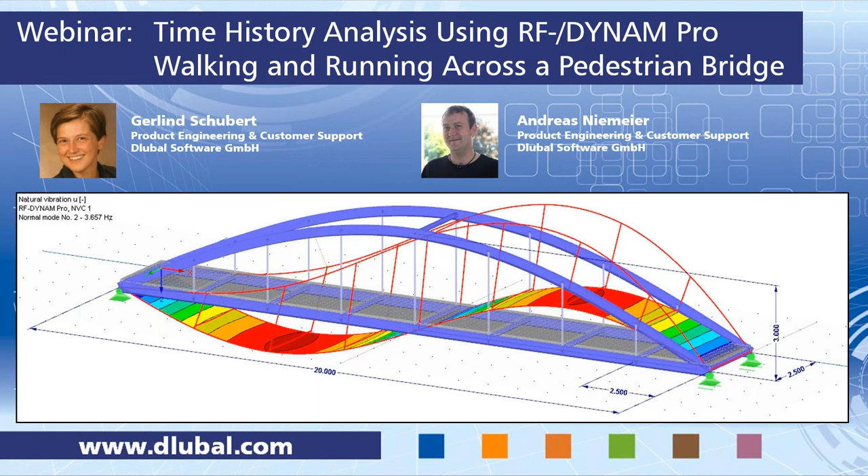We want to talk about time history analysis today and how to use RF-DYNAM Pro. We will simulate walking and running across a pedestrian bridge. My name is Schubert, I will demonstrate the webinar today and show you the example in RFEM, and my colleague Andreas Niemeier will help me throughout answering your questions. This is the model we look at today: an arch bridge, where persons walk in the center along the bridge. We simulate an excitation which changes in time, but also changes in position. That's the important bit today.

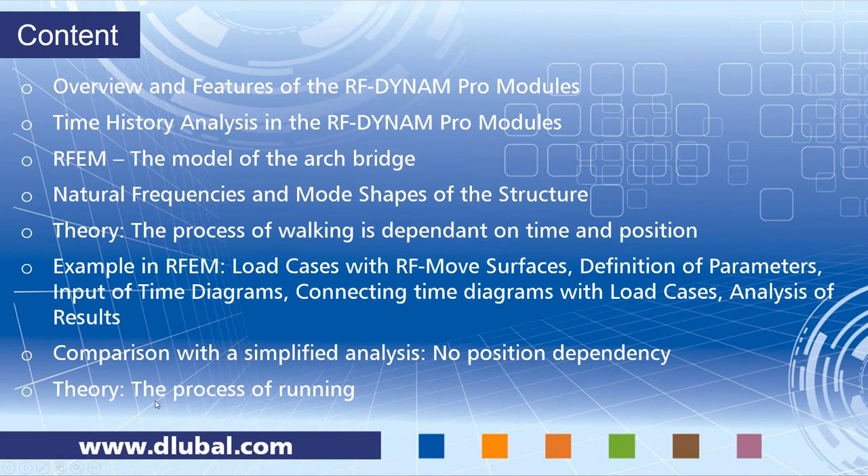Last, I will explain the theory of running. I will show you all the formulas needed to simulate running, but we won't do this as an example in RFEM since the input would be very similar. I'll just show you the formulas and how to do this. So that's the content - now you know what to expect, and we start with the overview of the modules.

We have 3 dynamic modules in RFEM - this is the same in RStab, our 2 program families: RFEM and RStab. Dynamic modules exist in both and are very similar. In RStab you can only consider members, while in RFEM you can also consider surfaces and solids - that's the main difference, but the dynamics modules themselves are very similar. So this webinar is also useful for RStab users, not only RFEM users. We have the module RF-DYNAM Pro Natural Vibrations.

This module can be used to analyze frequencies and mode shapes for member, surface, and solid models. You can directly import the masses from load cases, and you can combine these mass cases in mass combinations.

You can also import stiffness modifications, for example to consider the pre-stress of cables, or deactivate some members. You could consider the stiffness from RF-Concrete, and so on. This is considered as initial conditions.

The whole dynamic module at the moment is based on linear calculations. We have several eigenvalue solvers available and everything you'd expect from a modal analysis, so you get modal masses, effective modal masses, and modal mass factors, and so on.

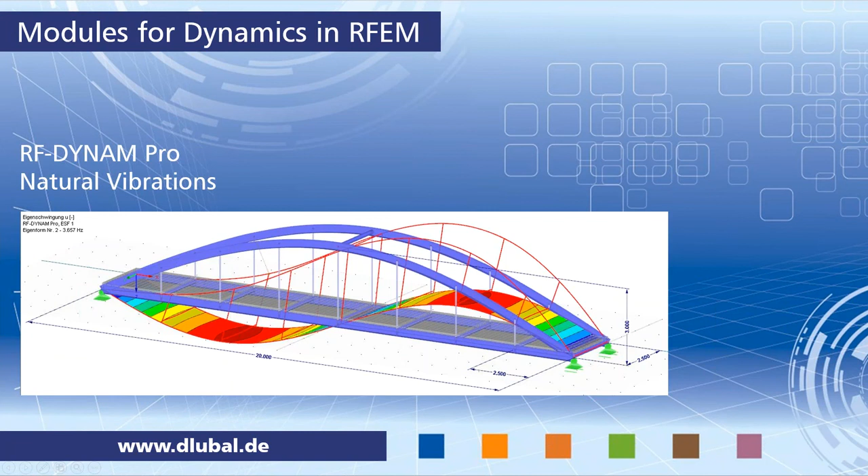Then we have the module RF-DYNAM Pro Forced Vibrations, which is based on the natural vibrations, so you need the natural vibrations as a basis. This module contains both the time history analysis, which is what we want to look at today, and the multimodal and multi-point response spectra analysis.

Today we consider only the time history analysis, and I'm concentrating the introduction on this one. The response spectra analysis is used to perform an earthquake analysis.

This is just a preview of the time course monitor. We will see this later on in the example again. This is how you can see the results in graphs versus time.

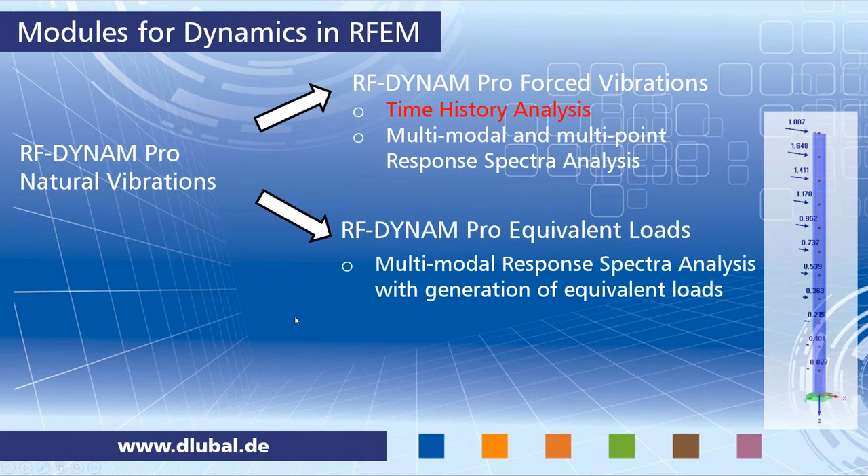Then we have the module RF-DYNAM Pro Equivalent Loads. This contains a multimodal response spectra analysis, so again it's the same, but here you get equivalent loads calculated and exported into load cases, which you can use then in RFEM, like in this little example here.

I won't go into detail on this equivalent load module. There is another webinar available, which I did earlier, about a natural vibration analysis and equivalent load analysis of a framework. You can have a look on our website and see previous webinars; you can download them or watch them directly as a video. That's possible with all of the webinars we did earlier.

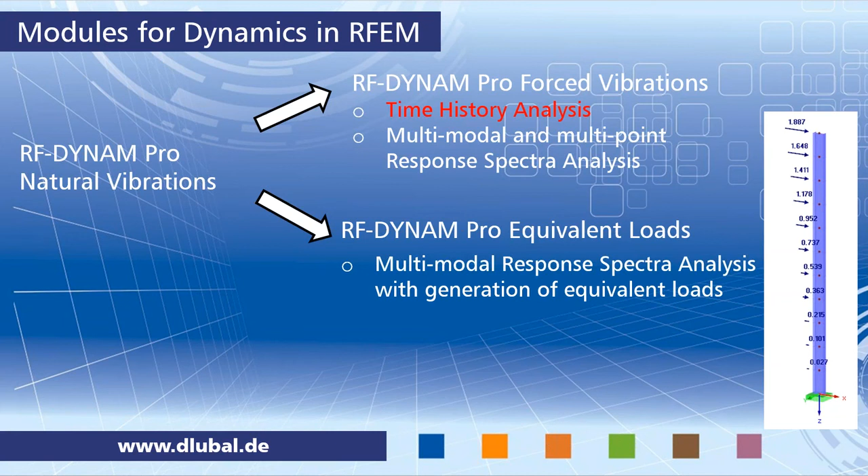As I said, we will have a detailed look into the forced vibrations, the time history analysis. We have direct integration implemented, using the implicit Newmark solver. There are different Newmark solvers available in the literature; we use the average acceleration method.

You could look in the literature for further details, for example Wilson's Structural Dynamics is one book I can mention, but there are many good books available about structural dynamics. Very important for the Newmark solver is to have a small enough time step to get accurate results. I'll come back to this point later and give some recommendations for the time step.

We have structural damping implemented, so you can choose between the Rayleigh coefficients and the Lehr's damping, entering them vice versa. This is converted internally, so you can choose whatever you prefer.

We present the results in a time course monitor and also in result tables. I showed you the time course monitor already, and we will see it again in the example. You can export results from single time steps, and also export result combinations, which is then an envelope over time.

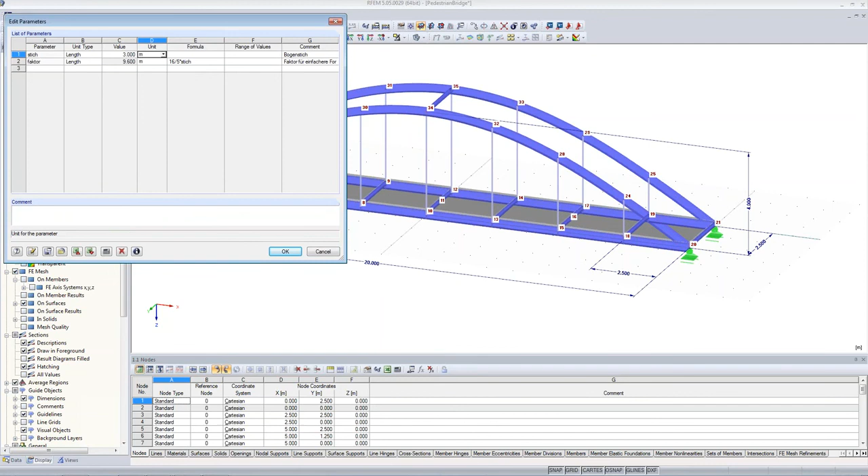So I already used some parameters in modeling the bridge. I want to undo this, so this is as it was originally. We will use parameters quite often today, and I used them already in the model.

I don't want to go too much in detail here. I defined a thin surface, which is just a thin concrete surface, a simplified model. Usually you would define an orthotropic surface, but I need the surface to define my moving loads later on with the add-on module RF-MOVE Surfaces, and that is why I defined a surface.

There's also a webinar available about how exactly this bridge was modeled and how the parameters were defined, shown in a webinar called Parametric Modeling of an Arch Bridge, available on our website. I will show you at the end of this webinar how you can access the webinars and download them.

So this is all about the model. We go into RFEM already.

Here we go, RF-DYNAM Pro, dynamic analysis. There are several ways to open add-on modules. You can also open them from here, dynamic, and then RF-DYNAM Pro. Here you see again the separation into the 3 add-on modules: natural vibration, forced vibrations, and equivalent loads.

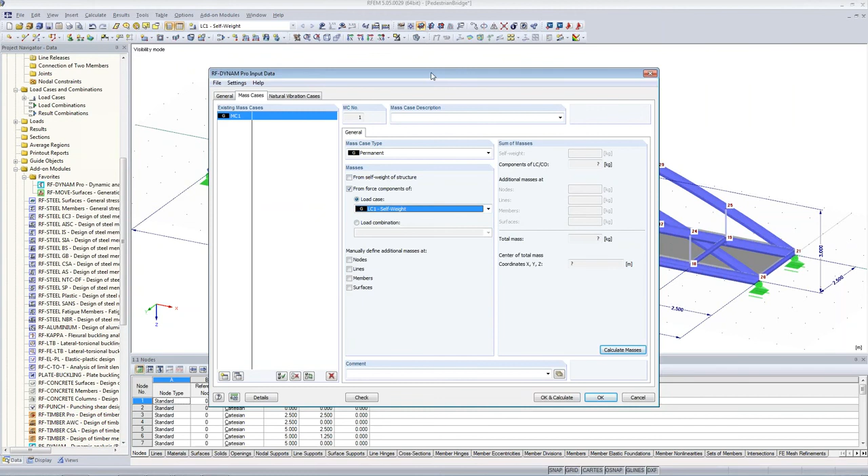I go into the mass cases, and I just want to import the load case self-weight that I defined. This includes the self-weight of the bridge and another 4 kilonewton per square meter for further footway structure that is not modeled itself, that I just apply as a load. So I import here the loads of the self-weight load case, and it's important to clear this checkbox here, otherwise you would double the self-weight.

You can calculate the masses internally if you want. If the model is too big, I don't really recommend this, but you can. This is for double checking the masses you actually import here.

You could also define nodal, line and member masses, surface masses, if you need, so you can define them manually to add, for example, something which is not modeled itself or which is not included in a load case. You can add this manually here, just as an option. So you have several options already here.

Then we have the natural vibration cases, where we import our mass case, and where I want to have a look at the first 10 eigenvalues. I just apply a diagonal matrix, which only considers the masses in translational directions, and I use the Lanczos solver, which is recommendable for such size of structure.

So it's not as big, it's a quite quick solver here, it's quite fast. Here's the part where you can import the stiffness modifications, as I said in the introduction.

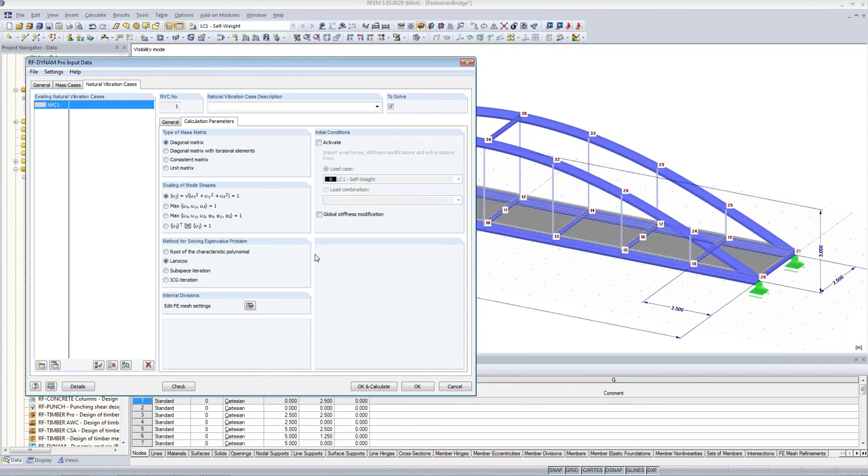But I go more into detail of these natural vibration cases in the other webinar I mentioned already, and I'll show you at the end that you find it and can watch it afterwards. So here we go, I just want to calculate the natural frequencies first of all.

So we have the dynamic results available in the main program RFEM. You reach them with this button, that's table 5, dynamic analysis, and you have several drop-downs here. At the moment, we have just one natural vibration case, so that's why the drop-down doesn't contain anything else. We will see this is increasing later on.

We can select the mode shapes in this drop-down, or we can just go through the table and look at the mode shapes in the graphic, updating automatically. Let's have a look at the first one: this is just the arc going to the side.

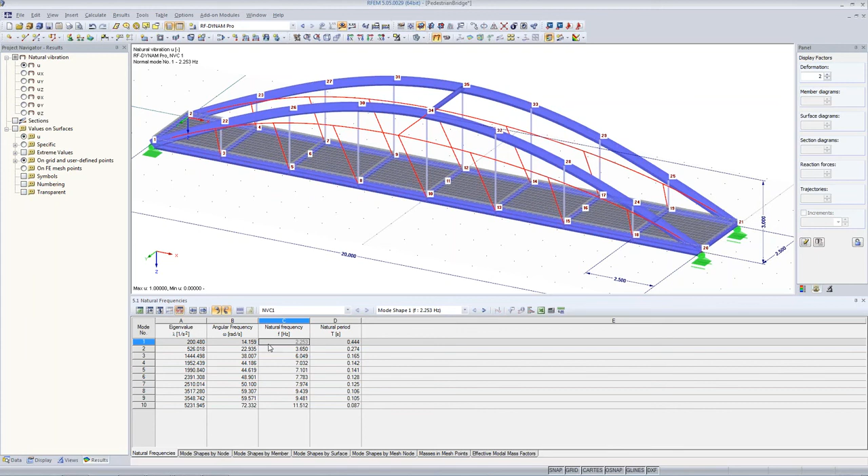And this one is relevant for us. This is the second mode shape with 3.65 Hertz, and this is the most relevant shape for us today, because this is the shape of the footway.

And what we learn also from this mode shape is that our critical load points are at the quarter points of the bridge, not in the middle. And the frequency, 3.65 Hertz, is below 5 Hertz. This means we have to consider the dynamics. We have to study this.

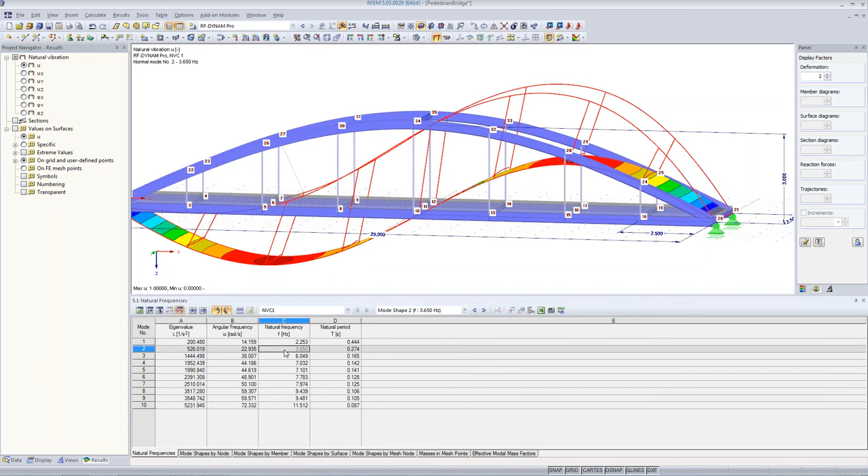As you all know, pedestrians are walking with approximately 2.5 Hertz, so this is relevant today.

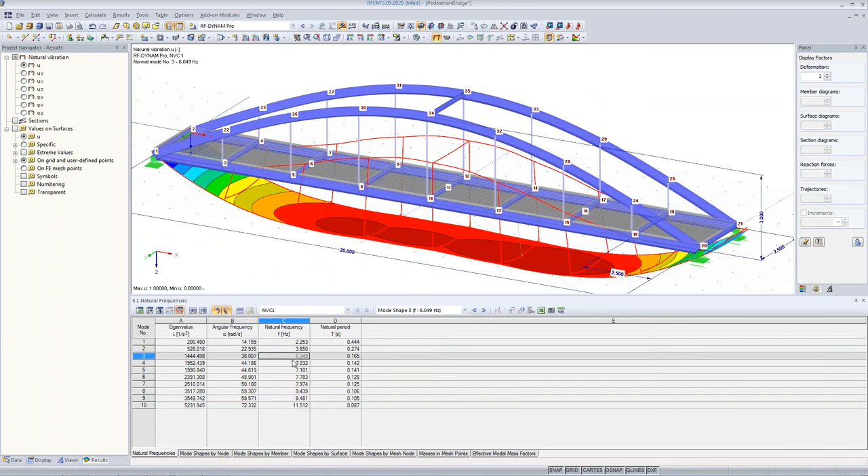Okay, and we can have a look at the other mode shapes just to complete this. Here the footway is going down, here we have a crossing arc, and here this is twisting - the whole footway is twisting. Second mode shape of the arc, and the third mode shape of the footway.

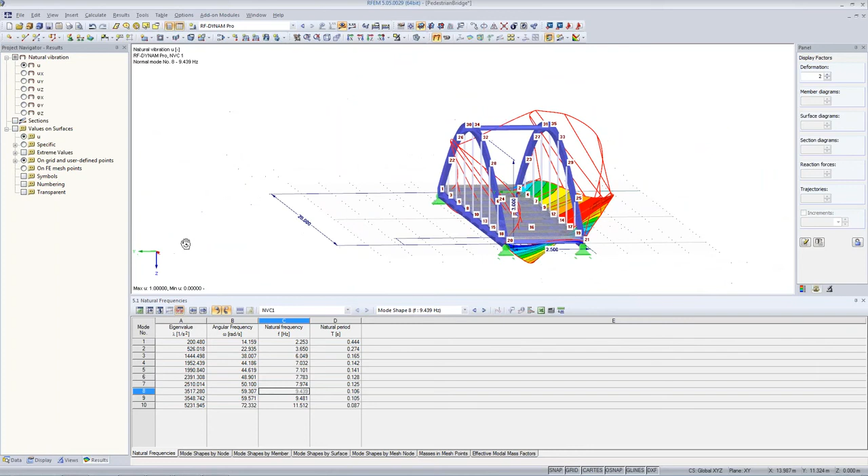And this is drifting away completely here. And this one, and the last one I want to show you is this one. Okay, so quite interesting mode shapes. For us, the most important mode shape is this one.

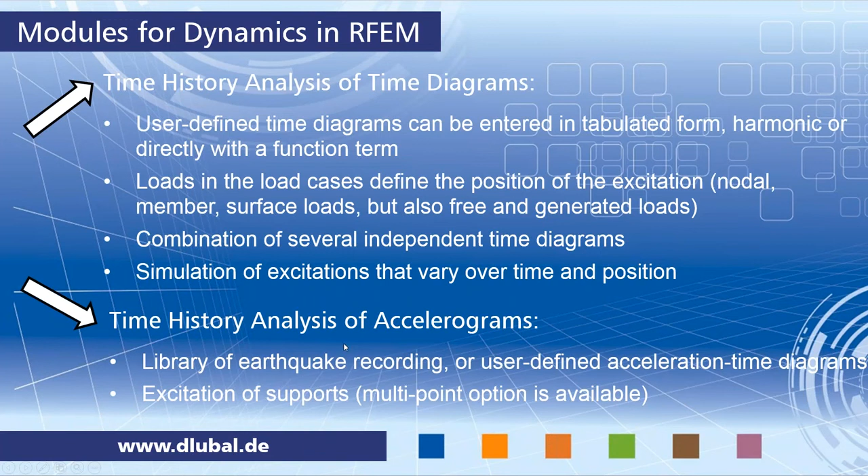So we go back to the presentation, and I want to come to the details of walking. I start with the vertical excitation, and this is the only one we want to model in our example today, because the horizontal excitation is then again very similar, and you will see how much effort it actually is to enter all these functions and so on.

So I'll show you this formula again when we enter it into RFEM so that you can really follow it. A walking person usually walks with a step frequency between 1.7 and 2.3 Hertz, and with step lengths of 60 centimeters to 1 meter. So this is usually the case, and you have to choose whatever is the worst case for your structure.

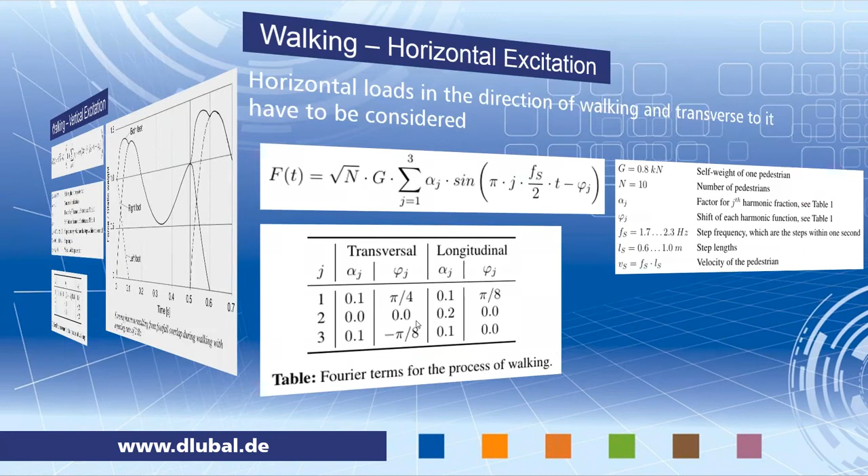The next one is walking. Walking also leads to some horizontal excitation, which comes from the push of the foot in the direction of walking, and from the movement of the upper part of the body transverse to the direction of walking. This is much smaller than the vertical load, and it only considers half of the step frequency, because all this is only happening either in the left or the right direction.

So I just want to show you this formula. It's quite similar, it's a sinus function as well. It consists of 3 Fourier terms, and you have the weight of the pedestrian. This is the number of persons - I'll come back to this later on. We had this in the formula for the vertical excitation as well. I'll explain later how this is calculated, or what kind of assumptions you have to make here.

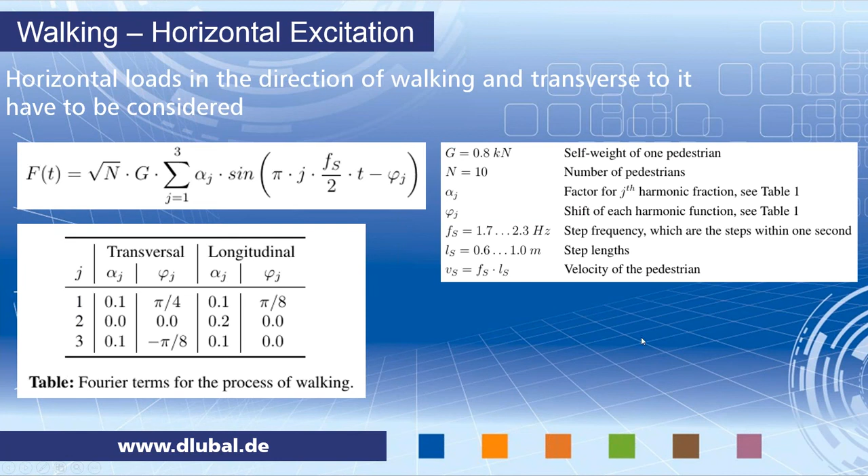We don't consider the horizontal excitation in our example today, but this might be quite important, and you have to consider this if your bridge is quite soft in the horizontal direction. So this might be important, but it's too much for this one-hour webinar today, so that's why I excluded it from today's example.

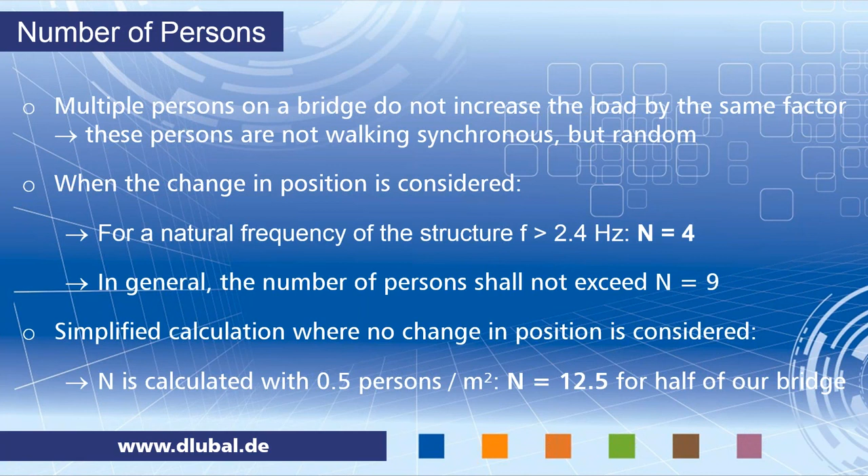As I said, we come back to the number of persons. Multiple persons on a bridge do not increase the load by the same factor, because these persons are not walking synchronously, they are just walking randomly. That's why you don't multiply by 10 because you have 10 persons on the bridge. Instead, in the formula you have the square root of the number of persons.

Then you have to think about how many persons are actually on the bridge. If there are too many persons on the bridge, you don't consider a dynamic problem anymore. If you think about a stream of pedestrians or a crowd, this is not dynamic - these persons are not walking or running anymore, they are moving slowly, statically.

We want to consider the dynamic case, and you find several assumptions in different standards. For example, the Eurocode suggests 10 to 15 persons, and it also depends if you consider the change in position or not.

So we start today with the detailed implementation. We study the change in position, and I found the recommendation: if your natural frequency of the structure is greater than 2.4 hertz, which is the case for us, you have to consider 4 persons walking along the bridge. In general, the number of persons shall not exceed 9.

When you do not consider the change in position, so when you simplify the calculation, you need to consider more persons. Then you should consider half a person per square meter, which would mean for our whole bridge that we have to consider 25 persons.

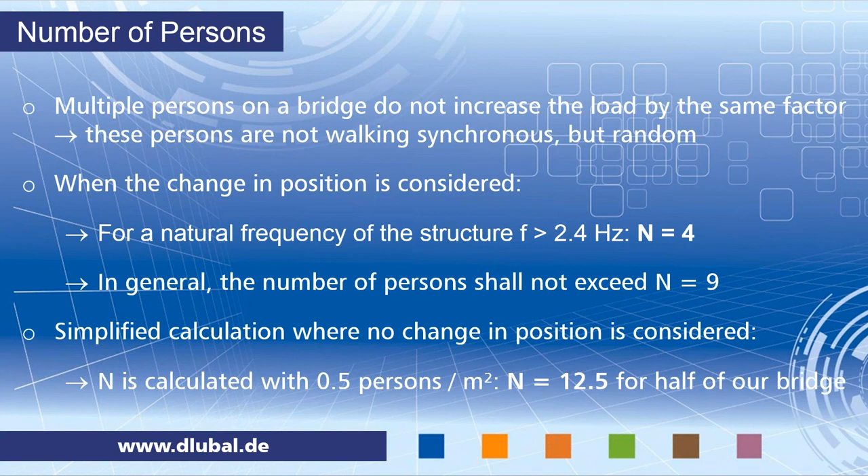Not only the structure is important, but also the excitation function. We have an excitation function, and the largest one is 6 hertz, so we end up with 0.0083 seconds, which is already a bit less.

I did a convergence study in advance of this webinar, and I studied larger and smaller time steps, and I ended up with 0.01 seconds being good enough and leading to accurate results.

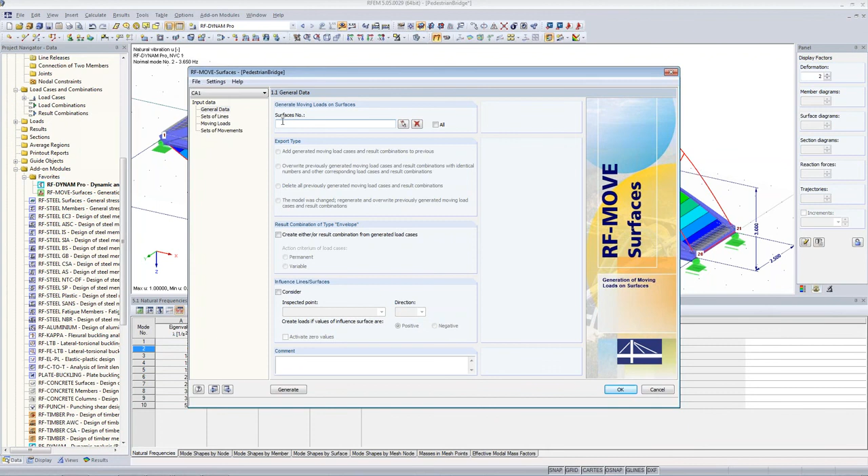Okay, so we want to have loads on all of our surfaces, so I apply the checkbox for all surfaces here. And this is all I have to do in the general data.

The sets of lines - so we have these pictures here that help us understand what's going on. So I start with the right foot.

I said this early on, we will have a step length of 62.5 centimeters. This means that the right foot comes to the ground every 1.25 meters - that's the moving step, 1.25 meters. And I apply also an offset at the beginning and at the end.

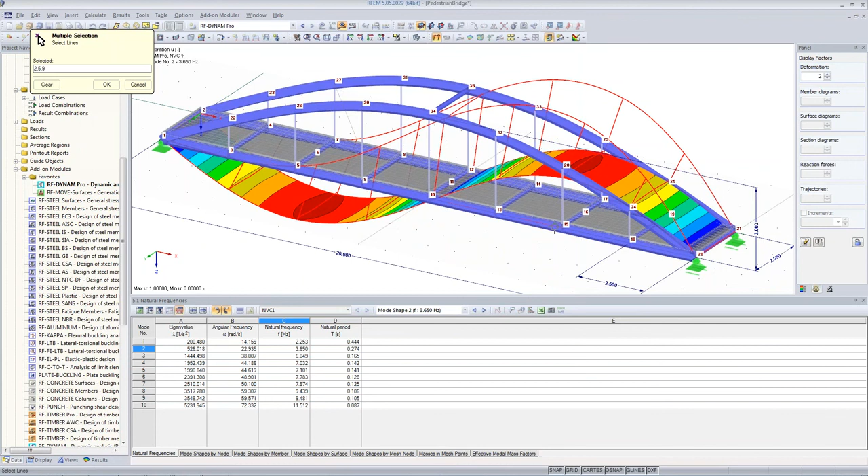Here, I have to select some lines, and I select those lines here. And then I have to define an eccentricity from there, to define how far away from this line my persons are walking.

In my case, I want the persons walking in the center of the bridge, and I decided to have the feet 30 centimeters apart from each other. This is something you could neglect, but I want to study this today. So I say my right foot is 1.1 meter from these lines we've just selected, and I have to apply a minus here.

This is something you have to try, it depends on the direction of your lines. My lines are going away from node 20, so that's why I apply a minus here. So this is the right foot.

I create a new set of lines, which I call left foot, with the same moving step of 1.25 meters. And now I have a larger offset, something you have to try out. This is just because my left foot is 1 time less on the bridge than my right foot, just through the process of walking.

So minus 1.4, as I said, 30 centimeters apart. Okay, so this is the picture for the eccentricity. You select the lines and then we define the EY here.

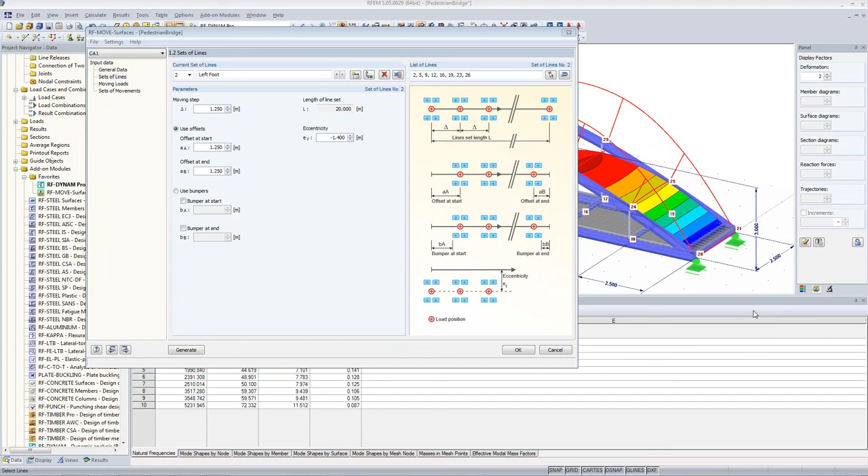So the next one is moving loads. We have both feet. So this is just the load itself we define here, both feet, which is a concentrated force.

And I want to just define 1 kilonewton here. That is because I want to define all the multipliers and the actual size of my force in the module RF-DYNAM Pro, because in RF-DYNAM Pro I can use parameters, and this makes it more flexible at the end. So this is why I've decided for 1 kilonewton here, just unity, and I apply all the multipliers later on in RF-DYNAM Pro.

So this depends on you. You could also define the weight of the pedestrian here, and then you would not define it in RF-DYNAM Pro.

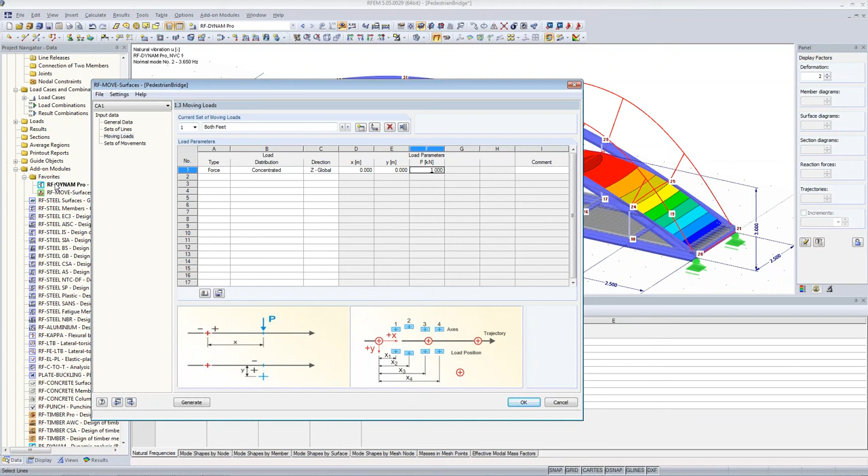It's just a multiplication. Okay, and then we define a set of movement where we define the right foot, and I just choose the right foot and my load we've just defined, and I want to have all these created load cases into the earthquake category. Not because I'm studying earthquake, just because nothing else really fits.

So we know where it's coming from, it's a dynamic study we do here. So I create another set of movement, which is the left foot. And again, I choose the left foot, and here both, and that's earthquake.

And you see now that the current set creates 15 load cases, and altogether we will get 31 load cases. And now I click generate, and I want to exit the module, yes.

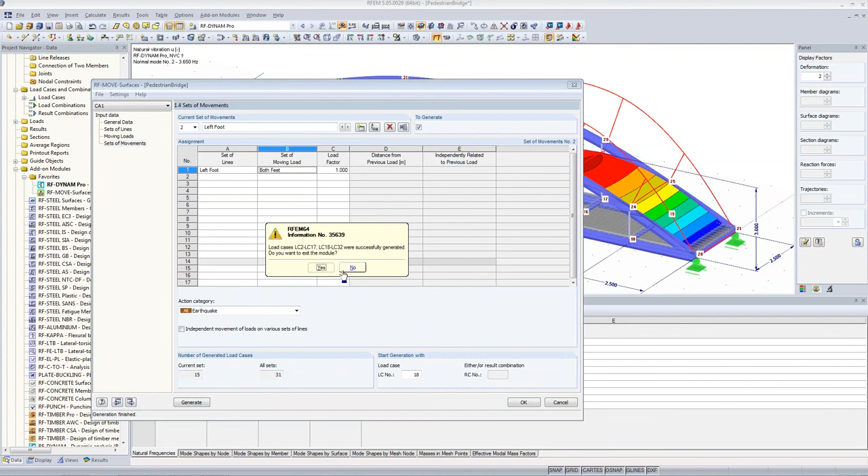And now I can show you what we did. We created all these load cases, and this is what I said, it's just a nice tool to make this a bit faster. So what we created is, when we have a look into Z direction, let's make these tables a bit smaller.

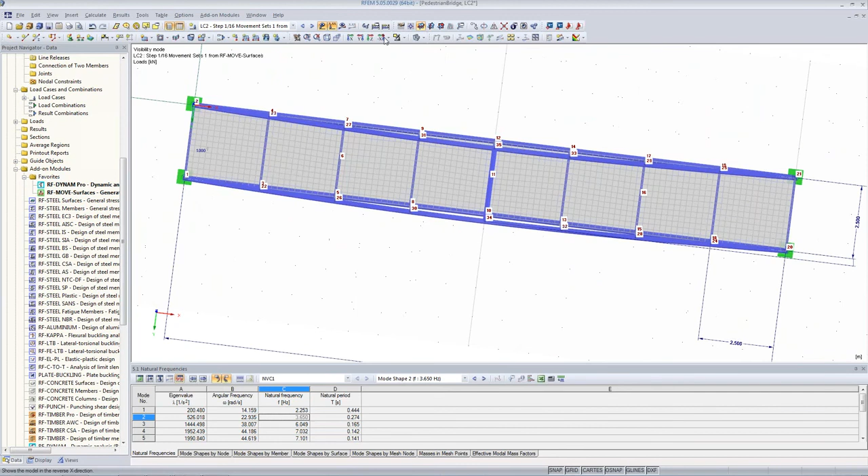And so we see our loads, here it's the 1 kilonewton. So, and now this is the right foot moving along, and after that follows the left foot.

We have to connect this then in the right order with our time diagrams. So, okay, that's us done with RF Move Surfaces.

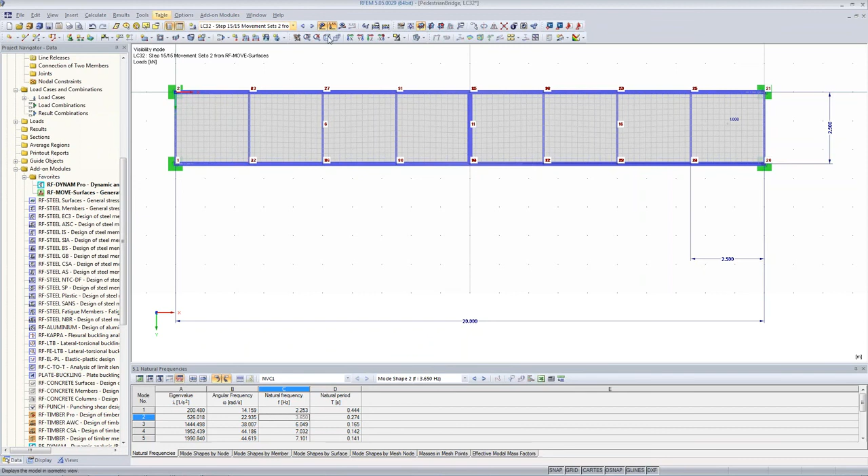Now I want to define a few parameters that we need for the definition of our time diagrams. So I go again into edit parameters, and I define here

the parameter G, which is a force of 0.8 kilonewton. So that's the self-weight of the person, which we have seen in the formulas, self-weight of person.

And we have N, which are the number of persons, which is dimensionless. So you have quite many different types of unit types available here. And I've said earlier that we have to consider 4 persons when we consider the change in position. So we have to apply 4 persons, number of persons.

And then we have the step frequency, which is Fs. There's no frequency available here, but it doesn't really matter in our case, so I just choose dimensionless, and we start with 2 Hertz. So we study a frequency of 2 Hertz, step frequency.

I just make a note here that this is actually in Hertz, so I don't forget. And this is all the parameters I want to define.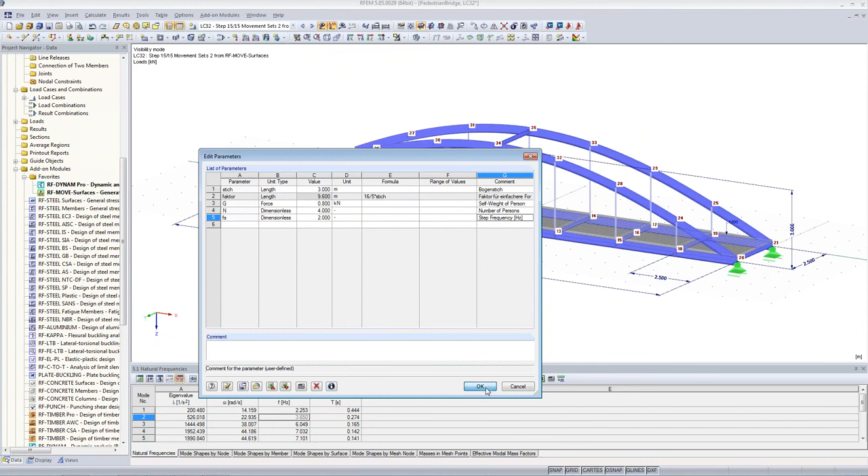Now I can go into RF-Dynam Pro, and we want to study time diagrams. So we activate the forced vibrations module and we activate the time diagrams. Now we have 2 more tabs here, the time diagrams and the dynamic load cases.

I show you the time diagrams, and as I said in the introduction, you can define it in tabulated form. You can enter whatever you want here, or you can import it from Excel. You can define a function as periodic, where you have to provide the excitation function, the excitation frequency, and the shift. That's what we want to do today.

You can define a function directly here in the edit fields. So when I get started with the right foot in position 1, I have to enter now the formula, and I start with the sinus function itself and then apply all the multipliers.

So it was 1 plus the first Fourier term, which starts with 0.4. Then we have the sinus function multiplied with the sinus function of pi 2 Fs and t.

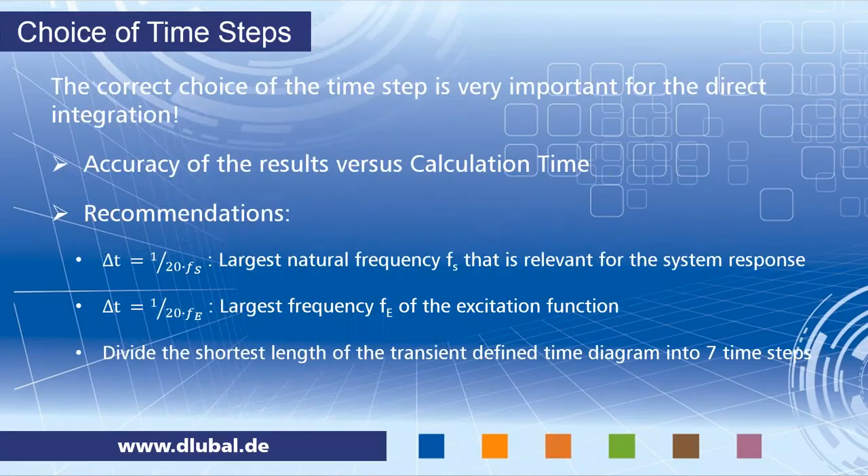So that looks already like what we have seen in the PowerPoint presentation. I go back to this, and I go back to the walking vertical. This is the function we just applied. So what I did is the term in brackets, 1 plus, and then I have the 3 Fourier terms, which are the alpha values: 0.4, 0.1, and 0.1.

And then I have the 2 pi multiplied with j. J is just increasing - 1, 2, 3. And then we have the step frequency and the shift down here.

So now what's still missing is the square root over n and the self-weight of 1 pedestrian. Here we have to be a bit careful, because we entered the self-weight of the pedestrian in kilonewton, but internally in RFEM everything is used in Newton. So I have to divide my G by 1,000 to really get my kilonewton.

So this is a bit tricky, you just have to be careful. I have defined 0.8 kilonewton in the parameters, but internally now 800 newtons are used.

So then I have the square root over n multiplied, and this is the formula I'm using finally. I'm just looking up to 0.47 seconds - this is what one foot is doing. The right foot in position 1 has the maximum of the heel and the maximum of rolling over the ball.

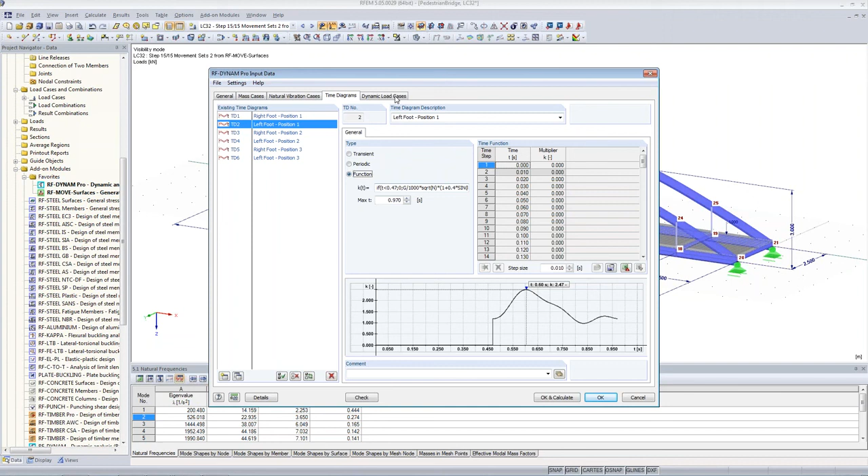So now we go to the dynamic load cases, and I show you what's going on here. But here the same - we will start entering everything, and I will then open a ready-made position where I've made all the input. So this is my dynamic load case - this is the walking in vertical direction.

And we will apply the direct integration, which uses the implicit Newmark solver, as I explained in the introduction. Here I will enter the time steps. As I said, I did a convergence study of time steps, and I came up with this - this is leading to very accurate results. This is fine enough, we don't need any finer time steps here. I want to consider this up to 15 seconds because it takes 15 seconds to walk across the bridge.

I want to export result combinations, and I could also generate load cases for the single time steps - this is here. I don't want to do this today, but this is something you could do.

Then I want to consider a damping - this is just a steel structure, so I don't damp it as much. It's a small damping value I enter here. And this is now the important bit for us - this is the point, the location where we combine the load cases with the time diagrams we have defined.

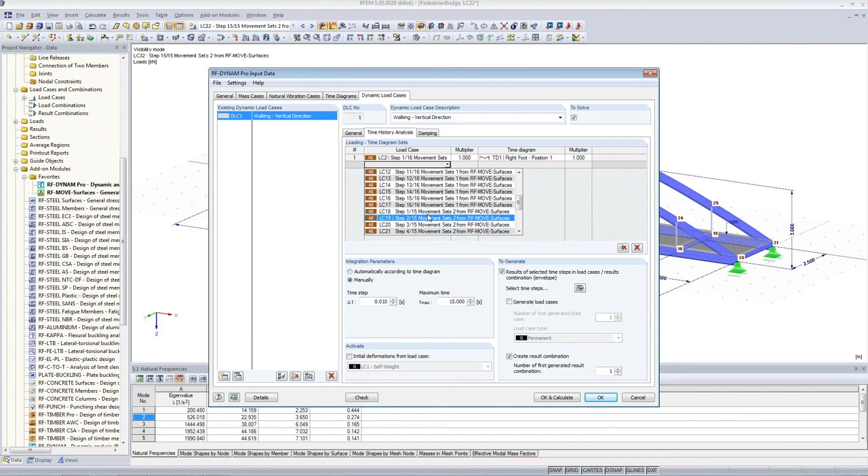So I choose the first load case, which is my right foot on position 1, and combine it with the time diagram 1. Then the step 115 combined with the time diagram 2. And the time step 2, the load case step 216, the right foot again on position 2 with my time diagram 3, right foot position 2, and so on.

So this is what you have to combine now - 215 TD4, 316 TD5, 315 TD6, and so on. So this is something I don't want to finish here in the webinar, because again you would just sit here and watch me doing this for maybe 10 minutes.

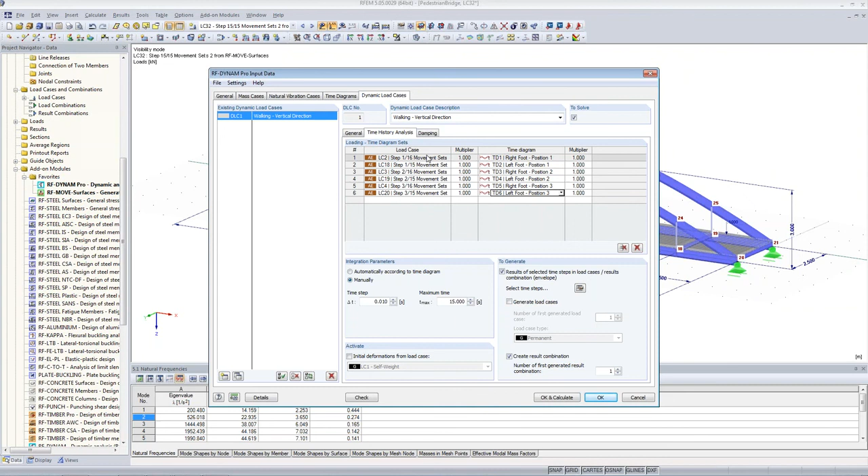So what I do, I just click OK now to close this, and I've opened another position already - same bridge, same model, everything done as we did so far. And I show you what I did in Dynam Pro. I already entered all these positions, so we can have a look through. We started with this one, and I stopped with you together here, and I did go ahead then.

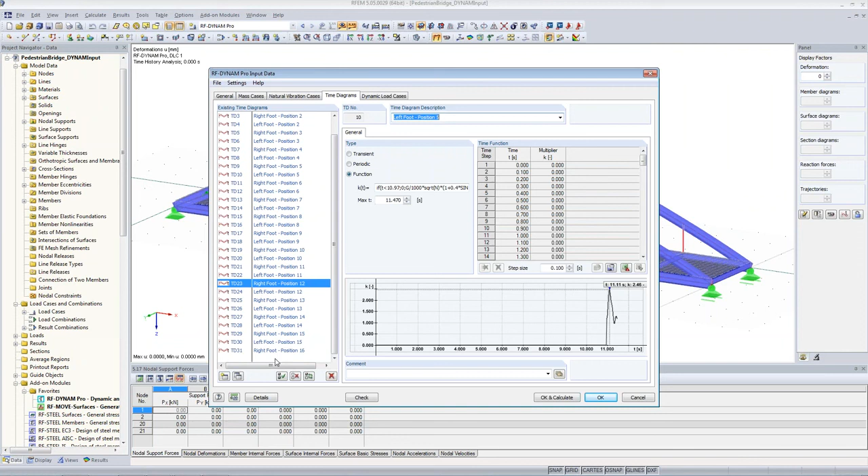So this is just moving along the time scale. And I did already prepare the dynamic load cases, walking - vertical load, where I combined here all the load cases with the time diagrams. The time step, we discussed this. I export result combinations, and I entered the damping here.

It's already green - I did the calculation already. It takes maybe 3-4 minutes. We do another calculation today, so you will see how long it actually takes.

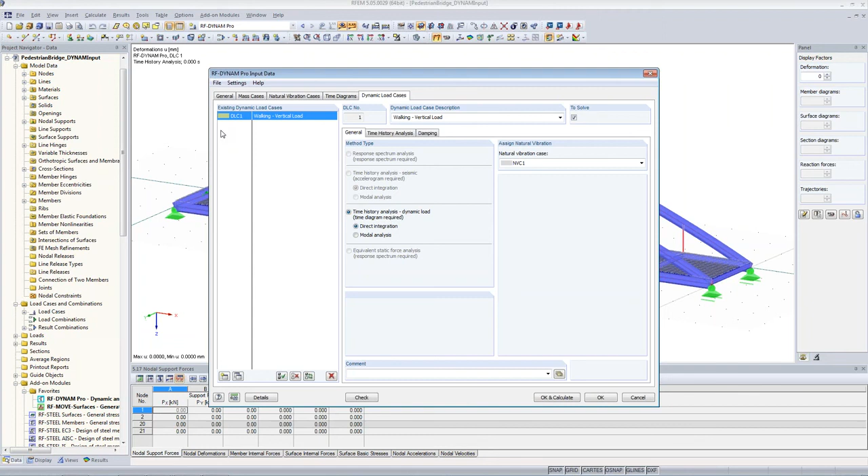The green color indicates that results are available. When you right click on this case, you could delete the results or delete the whole case, or clear and select this checkbox to solve. So we keep it as is - it's green. I click OK, and now I want to show you the results.

I'll show you the result tables down here. These are the dynamic results, table 5, and now we have not only the natural vibration case but also the dynamic load case. Because we did a time history analysis, we have all the time steps available, so we can watch results for single time steps and look at the dynamic envelope.

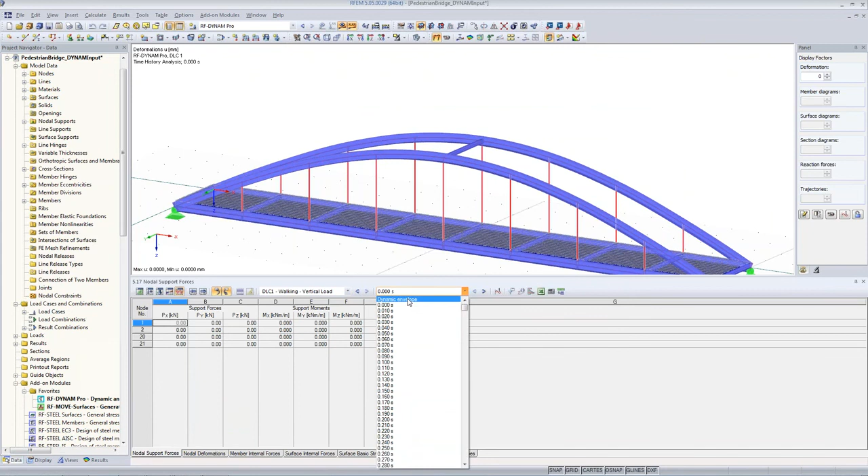Here we go, looking at the deformations, the deformations U. We get maximum deformations of 0.45 millimeters, which is reasonably small. You have the nodal deformations, member internal forces, nodal accelerations, and nodal velocities.

Important here, we have a direct link from the dynamic tables to the units and decimal places, and you come directly into RF-Dynam Pro. Some of the results are linked to RFEM, depending a bit on which table you're in, but you always get linked to the correct table.

Now we are in RF-Dynam Pro in the results, and we could change our accelerations to millimeter per square second, or we have the imperial units available, which is inch, feet, and yard. We stay with meter per square second because that's quite easy to compare with the acceleration g, the acceleration of gravity.

Here the same, you can change from millimeter, so this is all available. You can increase the decimal places. You have the same here for the input data, and the same for all the RFEM results in general. And also for the masses, you could change it into tons and ounces and so on. So we have here inch, feet, yards.

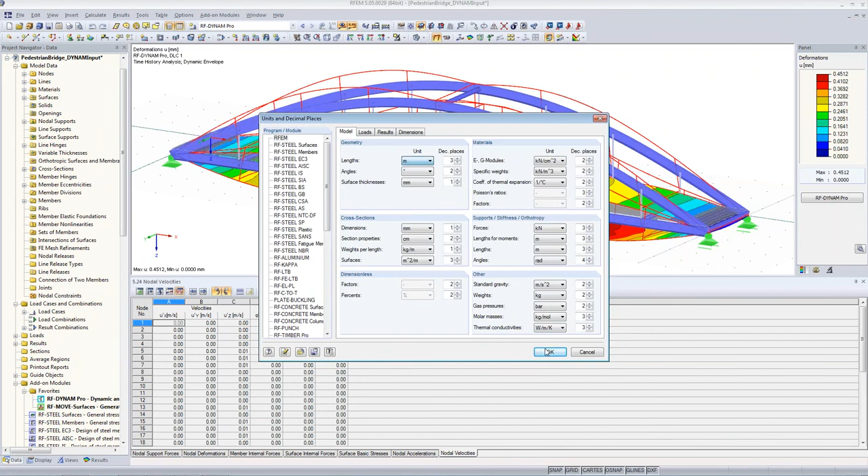A very important tool is the time history, the time course monitor, which you find either here or in the control panel, time course monitor. So we want to have a look at this.

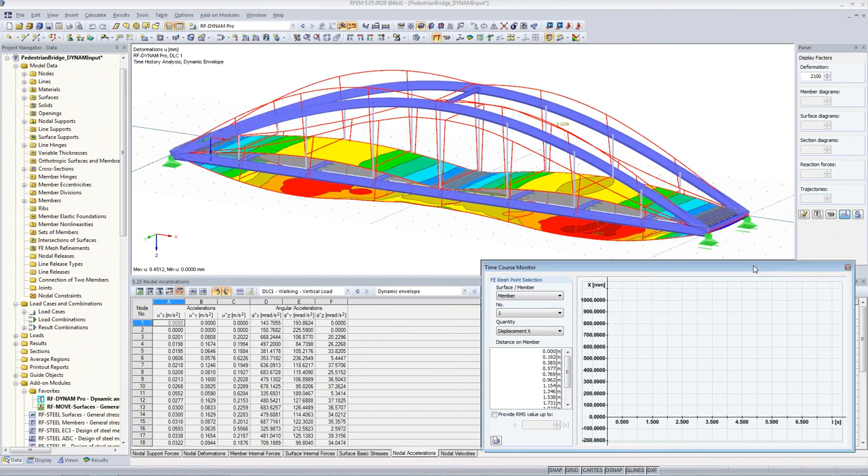I created nodes when I switch off the results here - I have to switch on the node numbers. I created node 6, which is in the quarter point, node 11, which is in the middle, and node 16, which is at the 3/4 point. So 6 and 16 are quite likely the nodes where we expect the maximum results, and these are the nodes where we will study the results now.

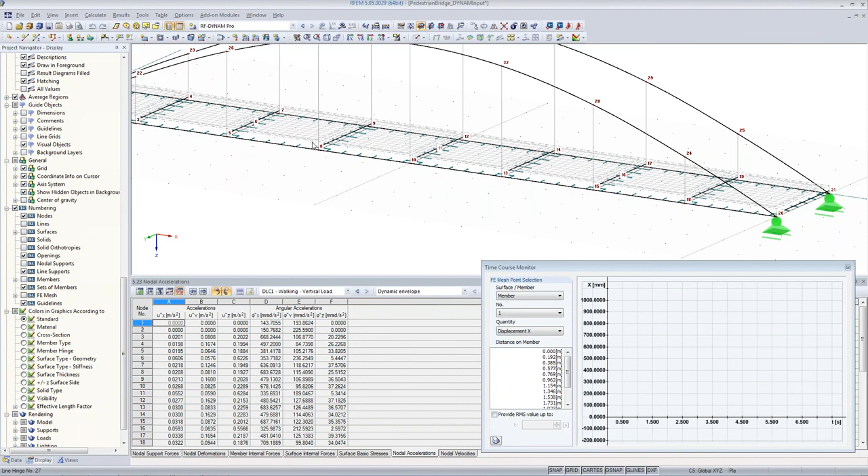These are all interacting, so when I click on node 6, my time course monitor gets ready and loads the data from node 6, and I want to see the displacements in Z direction. We have maximum deformations at 0.4 seconds here. We can also look at the root mean square value up to 15 seconds, which is often quite useful, especially when we look at the acceleration - so we'll have a look at the accelerations in Z direction as well.

We have quite a few peaks when the person is exactly at this position - the person is walking along node 6, and this is where we see the peaks. But when we look at the root mean square, it's a quite reasonably low acceleration, which is acceptable, and the peaks are still quite low and reasonable.

So we can look at the other nodes as well. You can use the control key on your keyboard to select more than one node. I could add node 11, and now you get both on the graph, and I can add node 16, so you end up with a timeline graph of all 3 points - showing the displacement in Z direction again.

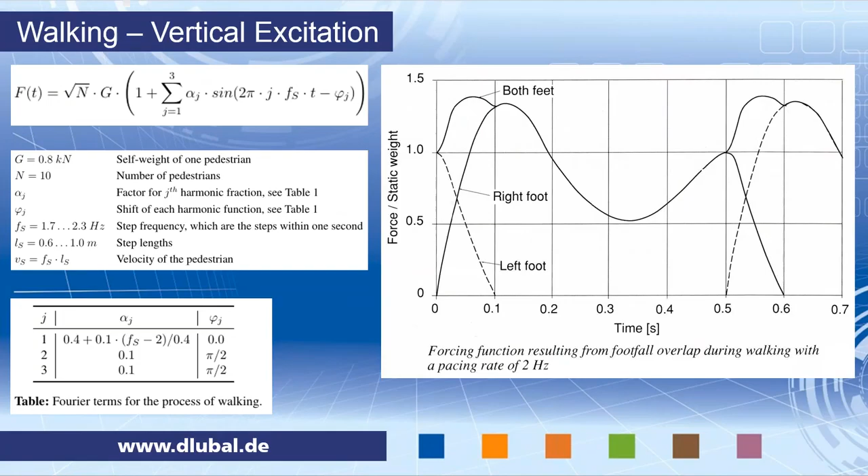Going back to our results, we have peak values of 0.6, so we are below the limits even with the peak values, which is quite good. If we look at the root mean square value again, which is just provided for single nodes, we are well below any of the limits.

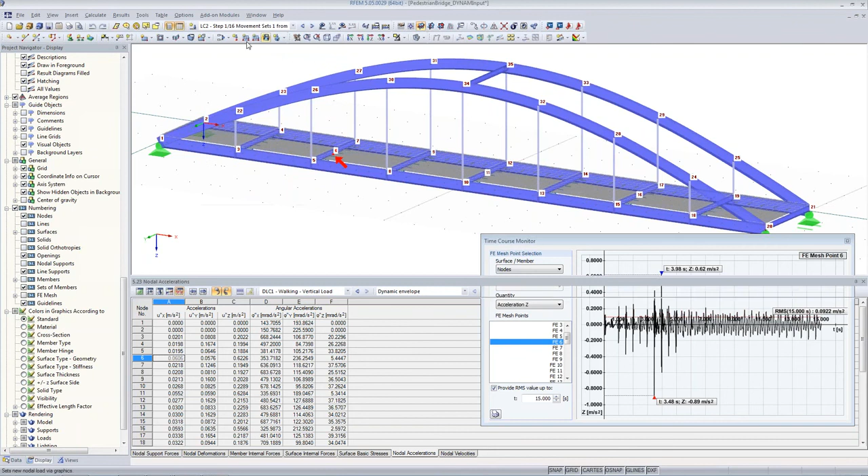So we are now done with the detailed consideration of the walking in vertical direction. We only consider the vertical case. We did this very exactly, combining all these load cases with our time diagrams and considering the change in position.

Now I want to emphasize again, you can use these parameters that you've entered here. You can change the self weight of the persons, the number of persons, and also the step frequency, because what you've entered in Dynam Pro is all dependent on these parameters. So you can easily change this and the time diagrams will adjust. You don't have to enter this all in the column again just because you want to study different things. So this is quite nice, and I really recommend using parameters.

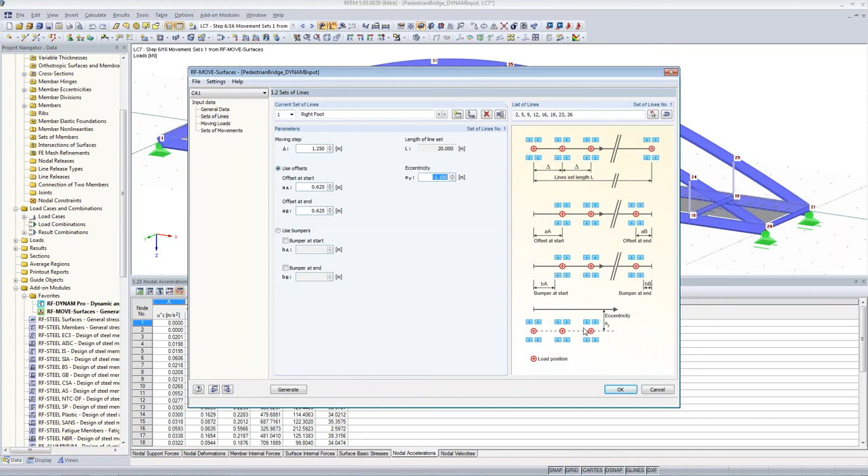Another thing I want to emphasize is that we've defined these sets of lines for the left and right foot, and we've defined the eccentricities, which is the distance between the lines we've selected and our walking person. We defined a walking person in the center of the bridge, but you can easily change this eccentricity and study persons walking on the left or right part of the bridge. You can generate new load cases, and they are automatically combined if you use the same numbers, and just run the calculation again to study what happens. Are the results very similar, or is it worse if the persons are walking on one side?

To finish up with this example, I want to compare this detailed consideration with a simplified calculation where we neglect the change in position. This is a simplified assumption you are allowed to do. I cancel this because I don't want to change anything.

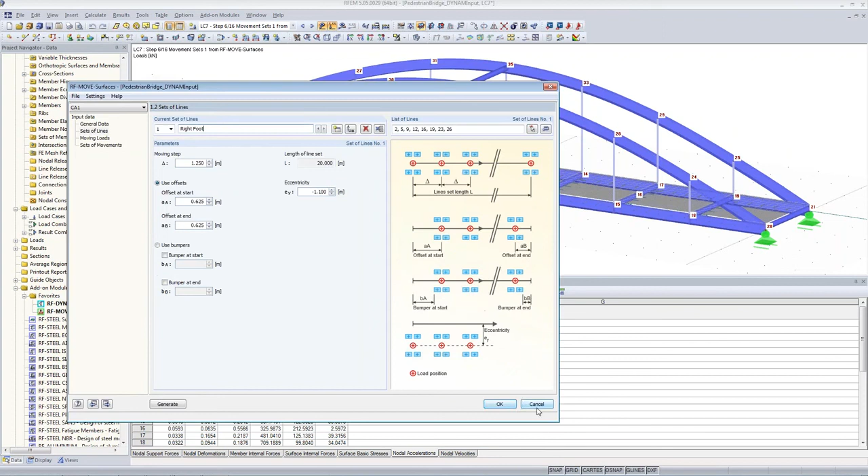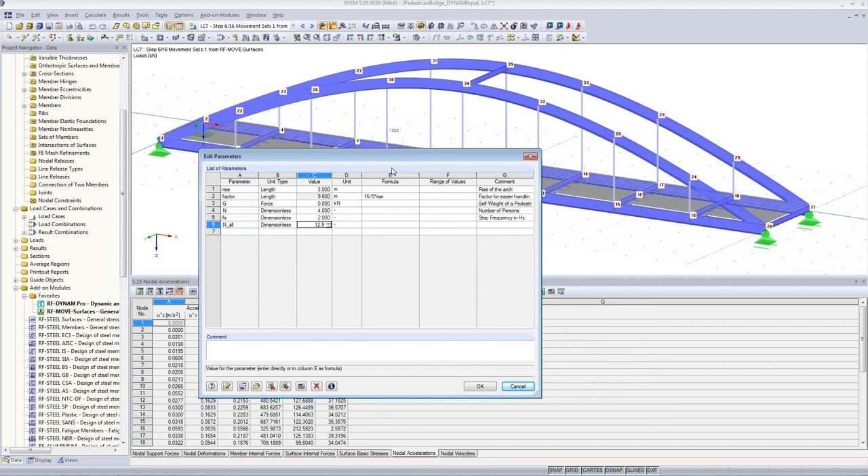We could just study persons kind of going around in circles on one position if you want. You have to increase the number of persons, that's what we've discussed earlier. So I will edit parameters and enter a parameter called N_all. I said it is reasonable that we consider only half of the bridge, so 12.5 persons walking kind of randomly along this half of the bridge, as the number of persons.

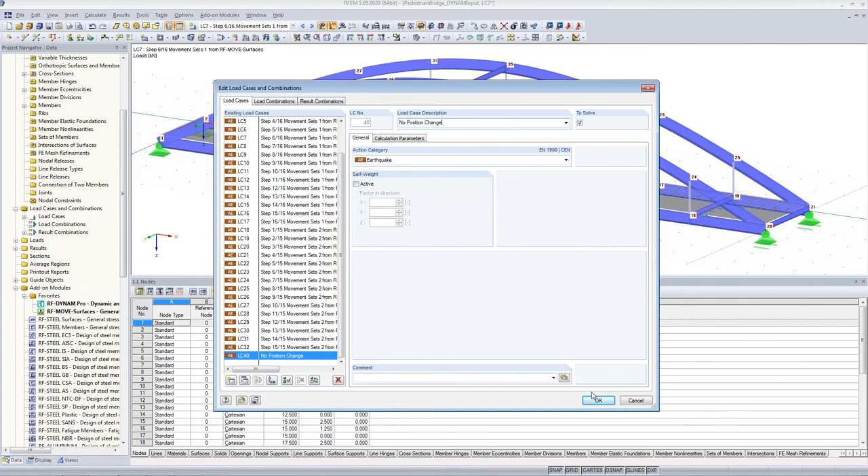We also have to think about our mode shapes, so node number 6 is the critical load position. I will define a new load case, which I can renumber to separate this a bit. I call it load case 40, and I call it no position change. I define a nodal load, a new nodal load, with 1 kilonewton in Z direction on the global coordinate system, and apply this on node 6.

This is here. Then I go back into RF-Dynam Pro and define another time diagram. I copy the first time diagram where I did not use the if function, and call it no position change. I have this function and all I have to change is the parameter.

So far, we only considered one period of one foot. Now, since several persons are going along, I would at least consider 2 periods here. So I would increase the max t to 1 second, or you can even study this a bit longer. At least 1 second means we have both feet on the ground.

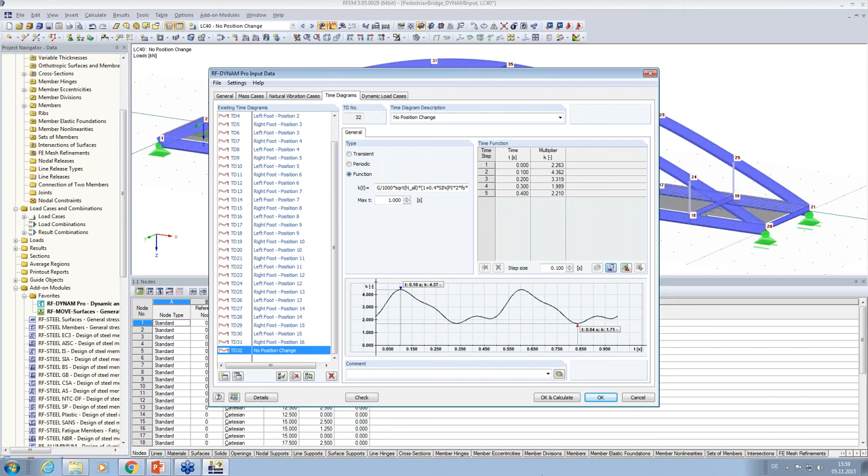Now we go to the dynamic load case and create another load case here. I copy this one - no, hold on, I don't copy this one because I don't want to have this long filled up table. I create a new one and say no position change.

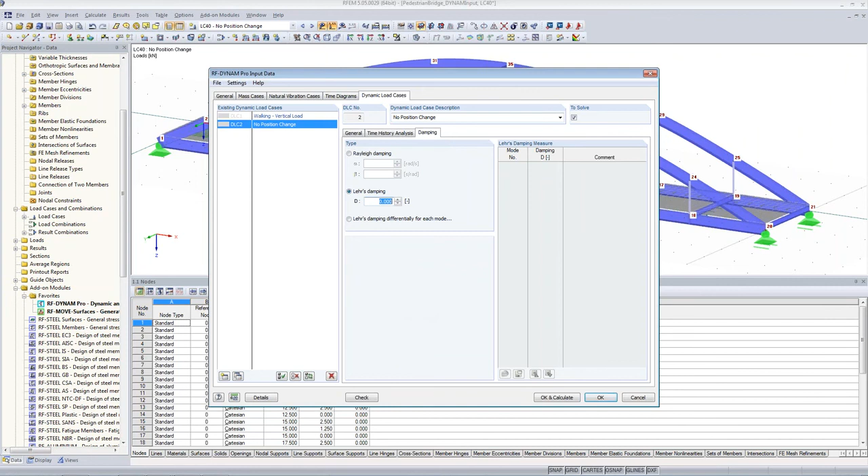I just combine the last load case, no position change, with the last time diagram. Again here we only consider this up to 5 seconds, because the time diagram we have defined is only up to 1 second, so this should be enough. I create result combinations, enter the damping value here, and calculate.

So we are nearly done. I'm a bit sorry, I'm running a bit late. So you see the time steps counting up here. So you can imagine, if you choose even smaller time steps, the time history analysis can be quite time consuming.

But it is a very accurate procedure to analyze your structures dynamically. So nearly done.

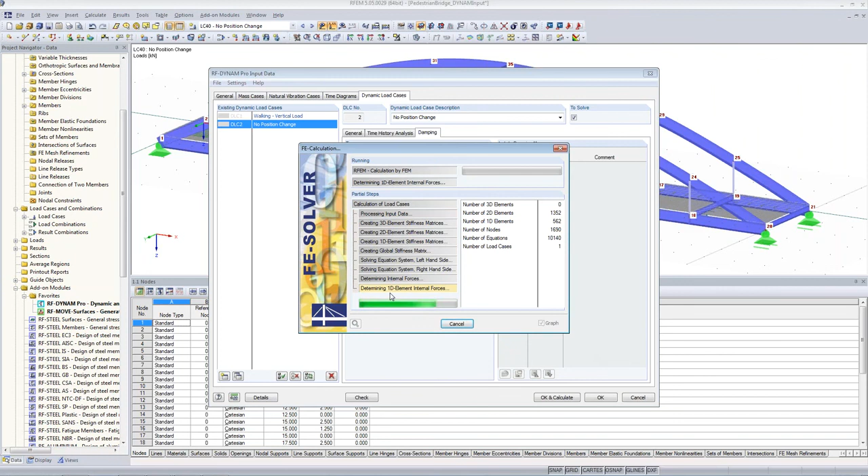And we have again a look into the time course monitor, and we will watch node 6. So I go to DLC2 and choose again my node number 6. I have a look at the displacement in Z direction. And here you see already we have a far larger maximum deformation, about 1 millimeter instead of just 0.4.

And the acceleration is the most important. We have peak values of 1.5 meters per square second, so above the limits we are allowed to. And I can also provide the root mean square up to 1 second, because this is the length of our time diagram. And here also it's far larger. Instead of just 0.09, we have nearly 0.4 meters per square second, which is still below the limits, but quite close.

So this is all I wanted to show you. We are finished now with the example in RFEM. I think this was a quite complex example, and just remember, similar to this, you can do whatever excitations you want. So you can simulate explosions, the movement of bells in churches, wind excitations, and so on. So you are quite flexible in load definitions and time diagram definitions.

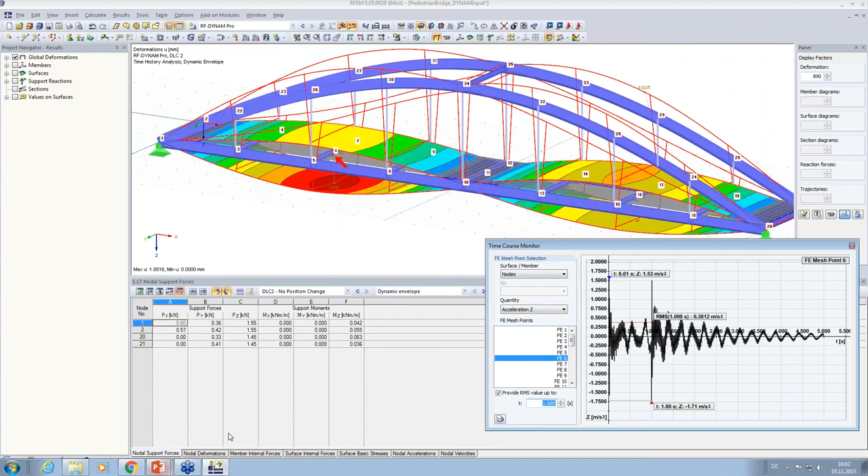But yeah, it's actually the same. That's why I don't want to do this again now, as we are already running late. So this is all I wanted to show you in RFEM about performing a time history analysis.

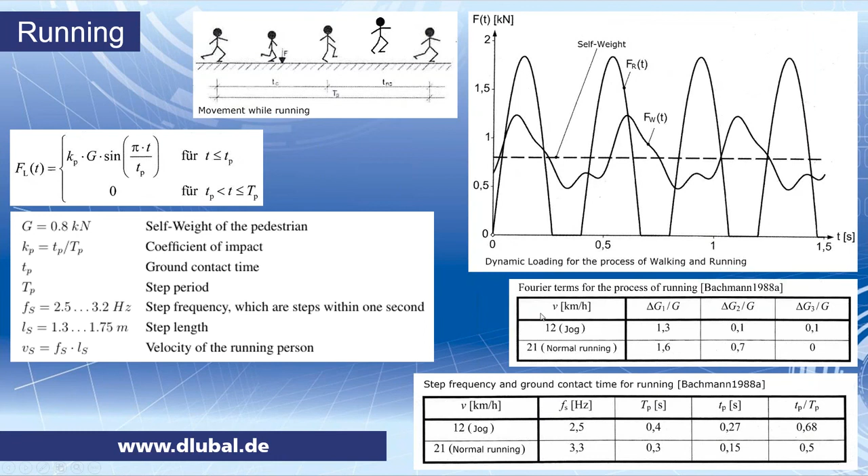I hope you enjoyed it and that you found it useful and interesting. And I just want to finish up the webinar and show you, just emphasize that we have a website.